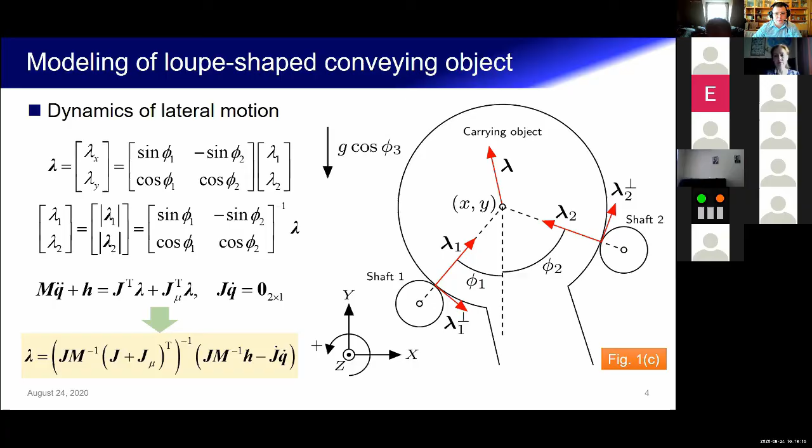The next paper will be advantages and disadvantages of biarticular actuators in bipedal robots. The authors of this paper are Atabak Nezhadfard, Karsten Berns, and Patrick Vonwirth.

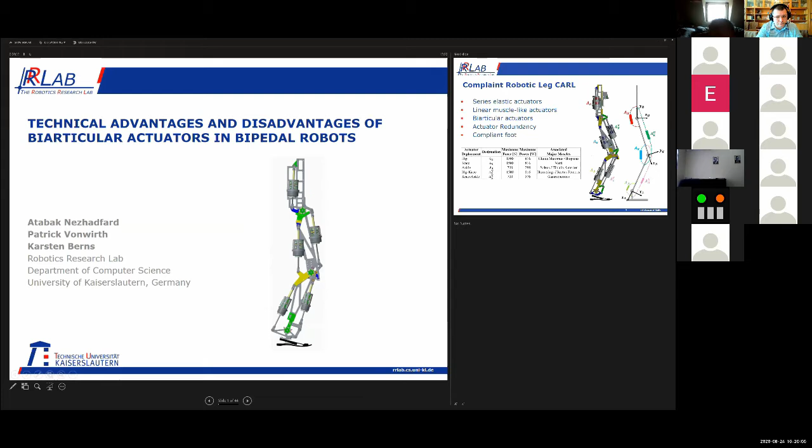In our robotics lab, we have designed this planar robot called CARL. The planar robot has 3 mono-articular actuators, which you can see on the back side of the leg. They are classic actuators connected to each joint.

In addition, we have 2 additional actuators called biarticular actuators. You can see them with the laser pointer - these are the biarticular actuators in front, and they are connected to 2 joints. For example, this one is connected to the hip and knee, and this one is connected to the knee and ankle. When activated, they generate torque in 2 joints simultaneously.

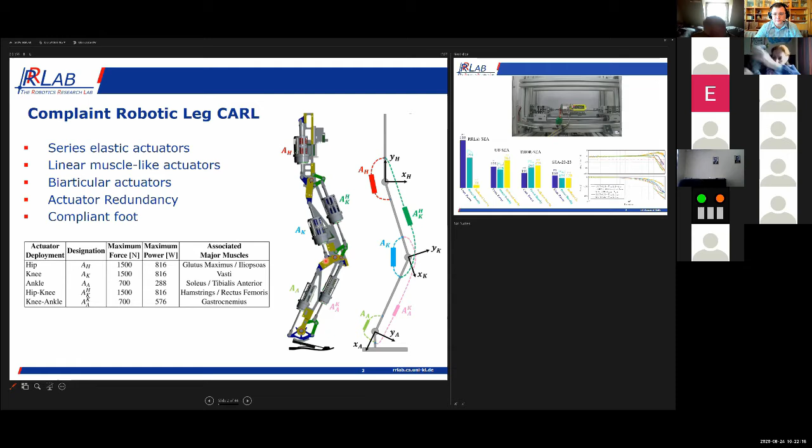This is the way that redundancy of the actuation system exists in our human body, and we want to bring this into the robotic bipedal leg. So we also designed series elastic actuators in our lab, which I will describe in the next slide.

In this video, you can see that we have series elastic actuators that have a ball screw transmission. This ball screw transmission gives us 95% efficiency. It has very small friction, which helps with back drivability of the actuator. We also have a very small reflected inertia.

You can see that compared to other state-of-the-art actuators, we have very small reflected inertia, and therefore the system is very back drivable, with high efficiency and good force control performance.

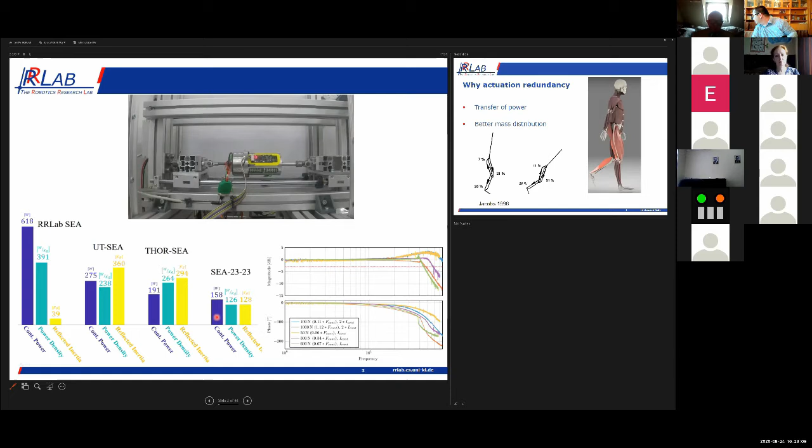So why do we have biarticulars in our body, and why do we want to bring them into the robotic leg? The main advantage of biarticular muscles is the transfer of power.

As you can see here in a paper from Jacobs, it shows that during the jump motion, 21% of the power needed in the knee is transferred by the biarticular from the hip. A similar power transfer happens from the knee to ankle via this muscle, which is 25% of the amount of power needed in the ankle.

This power transfer is quite important, because if we consider jumping in humans, only 50% of the power needed in the ankle joint can be generated by our shank muscle. The other 25% has to be delivered from the knee, and the other 25% has to be generated by the Achilles tendon. So if we assume that 25% of energy is transferred by the biarticular, by rough estimation we can say that the mass of the muscle connected to our shank can also be reduced by 25%.

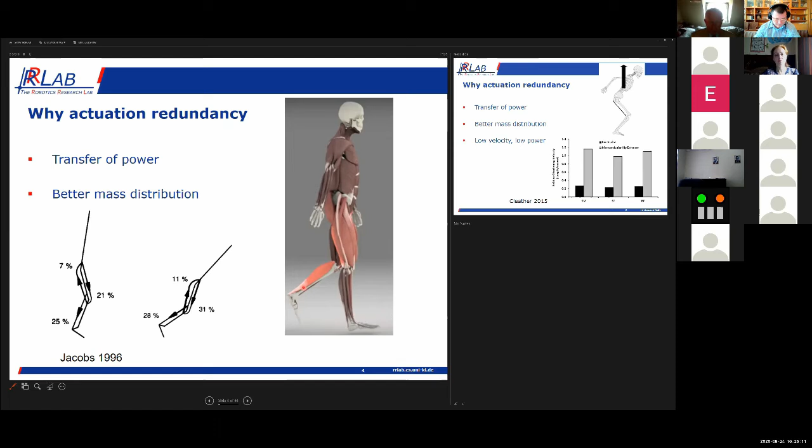The last important feature of biarticulars is that they are designed in a way that generates very low velocity - they experience low velocity during movement. For example, during explosive jump movement, biarticulars experience 30% of the velocity of the mono-articulars. This is quite influential for designing a biarticular actuator, for the decision on gear ratio and moment arm of the biarticular actuators.

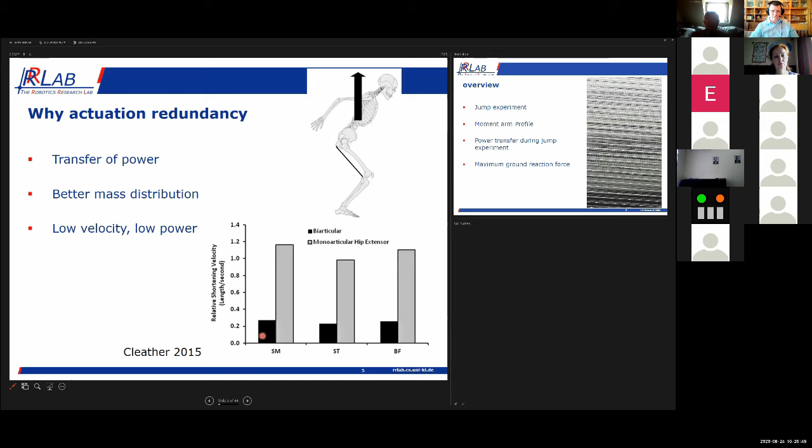As an overview, I will show how a robotic leg during the jump experiment can transfer power. This helps us understand the advantage of biarticulars.

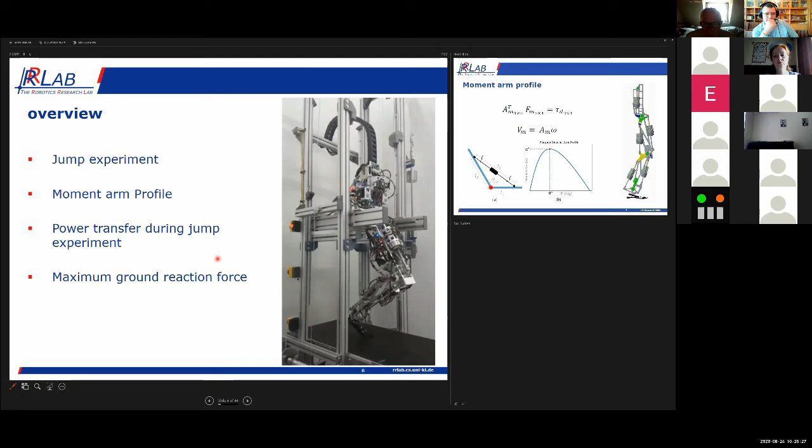I also discussed the moment arm profile of each actuator and its significance when we are designing the actuators. These are the important effects for understanding the advantage and disadvantage of the biarticulars. In the end, I will show the maximum ground reaction force due to having biarticulars in our body, and what happens if we don't have it.

So what is the moment arm profile? As you can see here, if we have a linear actuator, the moment arm of a linear actuator around the joint is always a nonlinear value. You can see that in some postures, our actuator is able to generate a high amount of torque - this has a high moment arm.

And in some postures, it loses its mechanical performance. The moment arm matrix defines the interaction between actuators. Here you can see the formula - the moment arm matrix is just a mapping from the force domain, or from the actuator domain, to the joint domain, the torque of the joint. A similar mapping exists between the velocity domains using the moment arm matrix. Each component of this moment arm matrix is one of these nonlinear profiles.

So, for example, assume that we want to generate torque in the knee here. If we generate the torque in the knee, the mono-articular actuator that's connected to the knee will be activated. However, there will be a biarticular also connected to the knee that activates and generates a side effect torque in the hip. This side effect torque has to be compensated by the mono-articular in the hip.

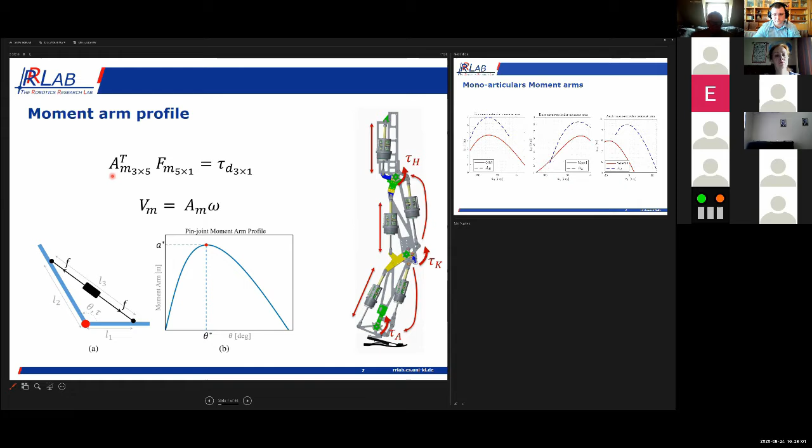So we designed the actuators, the moment arms of the actuators, trying to replicate human biomechanics. You can see here that they more or less have the same profile. The size of these magnitudes are different because the human muscles generate higher forces, so they have a smaller gear, smaller moment arms.

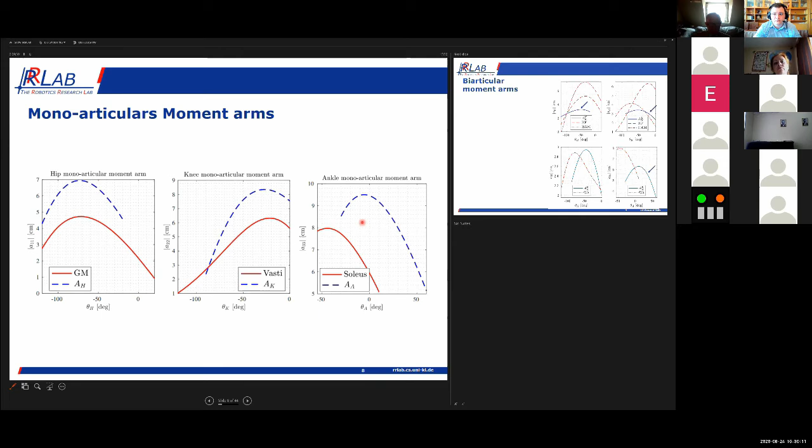As you can see here, the moment arm in the hip follows the gluteus maximus muscle. The moment arm of the knee follows the vasti muscle group, and the moment arm in the ankle follows the soleus. We have a 30-degree difference between the soleus and ankle because of the missing degree of freedom in our toes. Since the robot does not have this toe joint, which is called the MTP joint, we have to make a 30-degree difference to be able to perform the motion task that is needed for walking, running, and locomotion.

So one of the side effects of the biarticulars is to have a small moment arm compared to the human muscle. Here is the human muscle moment arms, and you can see that we achieve a much smaller moment arm with the biarticulars. This reduces the capability of the actuator to generate torque in the joints.

The reason for this is that the actuators are spanning two joints, and each joint has a 100-degree, 150-degree range. So these actuators - for example, the actuator that is connected to the hip and knee - has to have a range of 100 degrees for the hip and 100 degrees for the knee, and this reduces its moment arm. Similar for the ankle and knee biarticular in the lower part of the stage.

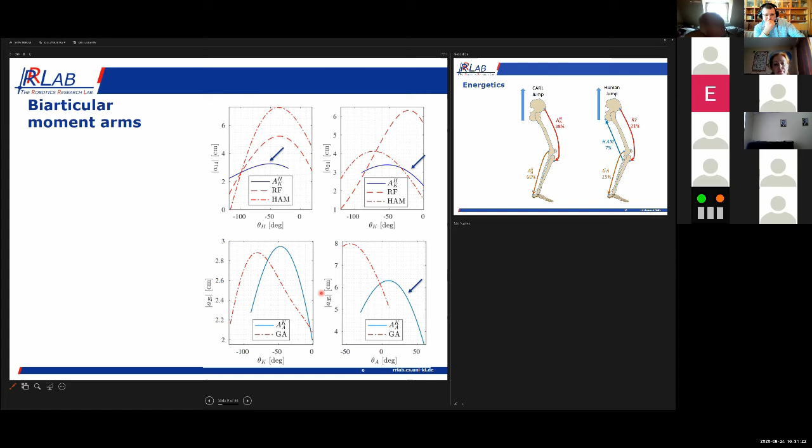So if we compare the energetics of the jumping movement of the robot with the human, you can see that we can achieve similar behavior from the biarticulars if they are designed correctly, in a way that power transfer happens from the hip to the knee, and also power transfer happens from the knee to the ankle. It is similarly reported in humans, but in humans these power ratios are different.

One of the major reasons is that the dynamics of the robot and the human are different. We do not have a trunk in the experiment that we show, so the power distribution between joints would be different. But as I can show here, biarticulars are advantageous because they can transfer power both in human and in robot.

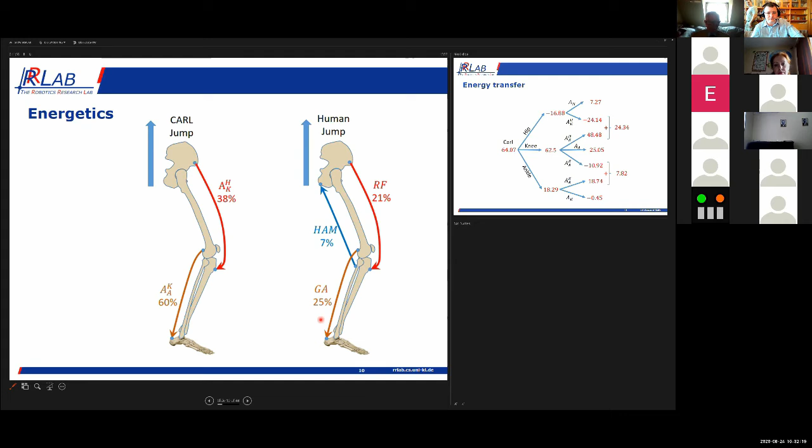So here I put the values of these power transfers. For example, the biarticular between hip and the knee takes 24 joules of energy from the hip, transfers it to the knee, and meanwhile generates an extra positive 24 joules of energy. Similarly, there will be a 10 joule transfer from the knee to ankle, also generating positive extra 7.8 joules of energy. This transfer of energy is reported similarly in humans.

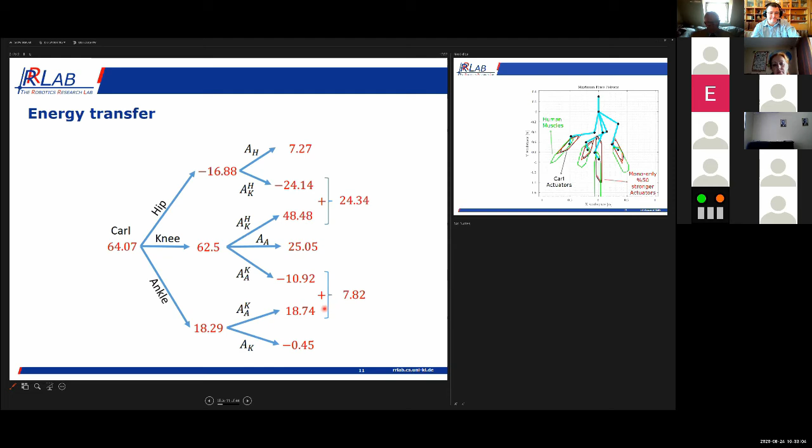There is another advantage of the biarticulars, which is about the maximum ground reaction force that the leg can generate. These biarticulars can increase the maximum ground reaction force and therefore can improve the performance of the leg to compensate its weight, the body weight.

For example, here the red polygon is a virtual Carl leg that has 50% stronger mono-articular actuators and does not have a biarticular, it's mono only, but has a 50% stronger actuator. You can see that this acts similarly to Carl, the black polygon, which has two biarticulars and the mono-articular is 50% reduced. This also means that by distributing properly the mass over the body, we can achieve similar ground reaction behavior as by just increasing the mono-articular actuator by 50%.

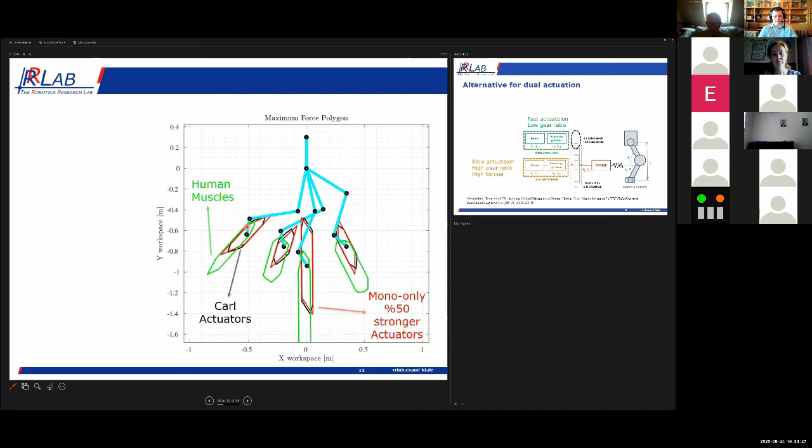One of the benefits of the biarticulars is that it can act as an alternative for dual actuation, dual motor systems. Here I show a paper recently published about dual motor systems in which one actuator consists of two motors. One motor is for fast movement, which requires low gear ratio. The other motor is for slow movement and high torques. So they have two motors to perform at different operating points, operating conditions.

If we have biarticulars, we can alternatively have redundancy. Instead of having two motors in one actuator, we can have two different actuators. Mono-articular actuators can act for fast movement and low gear ratios, and on the other hand, biarticulars can act as a slow actuation system with a high gear ratio. As I showed in humans, the biarticulars also act slowly. This way we can also improve the mass distribution in the leg. Rather than putting both actuators at one point, we can distribute the mass throughout the body and reach a better bio-inspired leg.

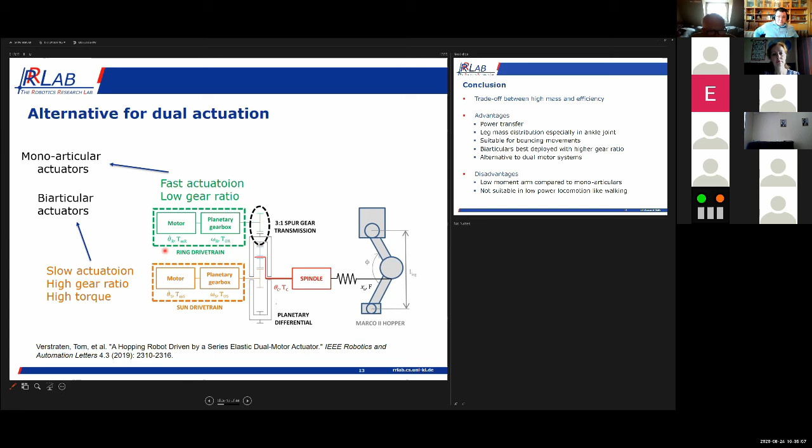So in conclusion, I want to say that at the end, we end up with a trade-off between high mass and efficiency. If we increase the actuator redundancy, it means we are increasing the mass of the leg by adding redundant actuators. However, by adding the redundant actuators, we can also improve the efficiency. So the whole thing comes down to a trade-off between these two, and also depends on the type of actuators we select and the locomotion type we choose.

As I showed, as an advantage, the power transfer happens in the leg. We can achieve similar results in the robotic leg. We will have a better mass distribution, especially for the shank actuators and shank muscles. We can achieve better bouncing movements like running and jumping with the leg. The biarticulars can be deployed as high gear ratio slow actuators, and it could be an alternative for a dual motor system.

The disadvantage is that the biarticulars will have smaller moment arms compared to mono-articulars, and therefore their torque capabilities and efficiency will be decreased. On the other hand, it is not shown any power advantage of the biarticulars for walking locomotion. Unfortunately, it is shown that there is no clear evidence that the biarticulars can help for walking. This is from the power transfer perspective, but I do not know about the technical benefits of a biarticular actuator.